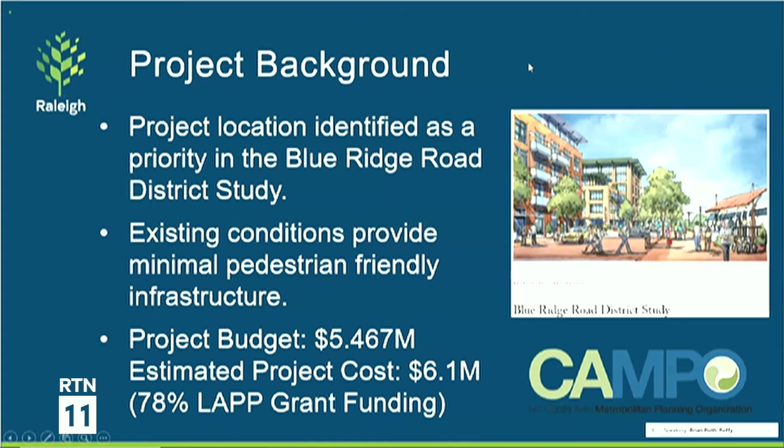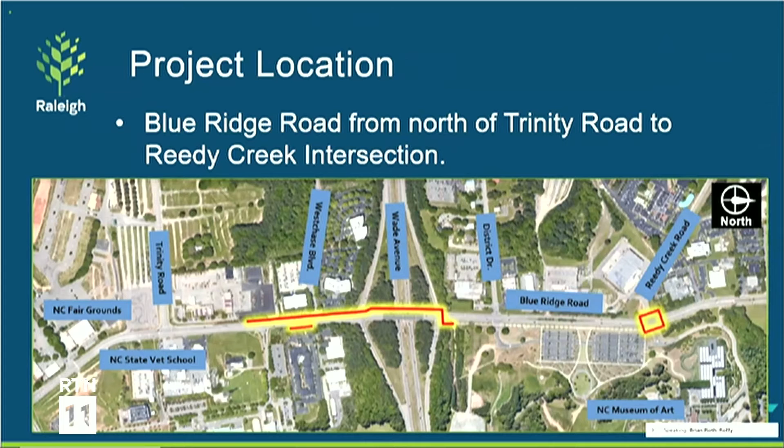So just a quick location. Obviously, Blue Ridge Road is very long, but really the intent of the project was to provide connectivity between two existing sets of infrastructure. To the south, we have a lot of things going on, the NC Fairgrounds, as well as the NC State Vet School. And then moving north, connect to the North Carolina Museum of Art, as well as the Reedy Creek Trail.

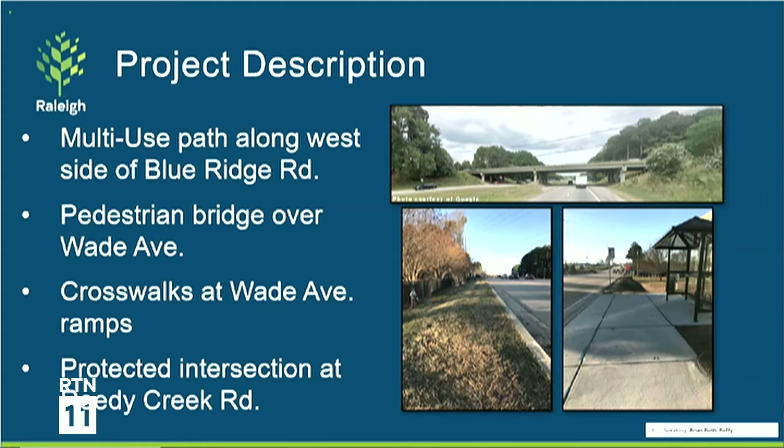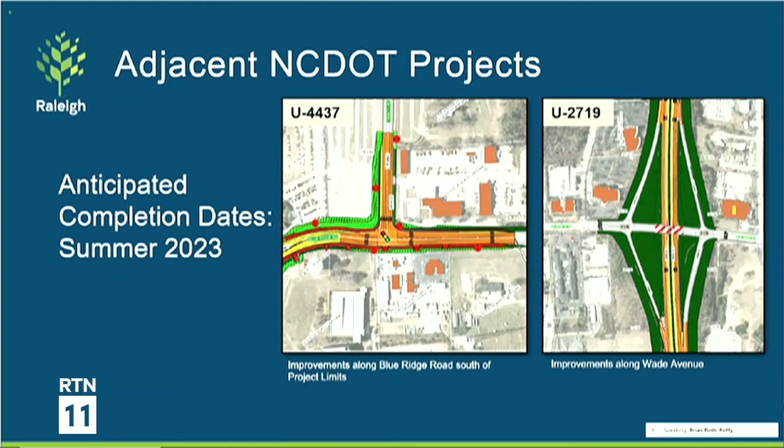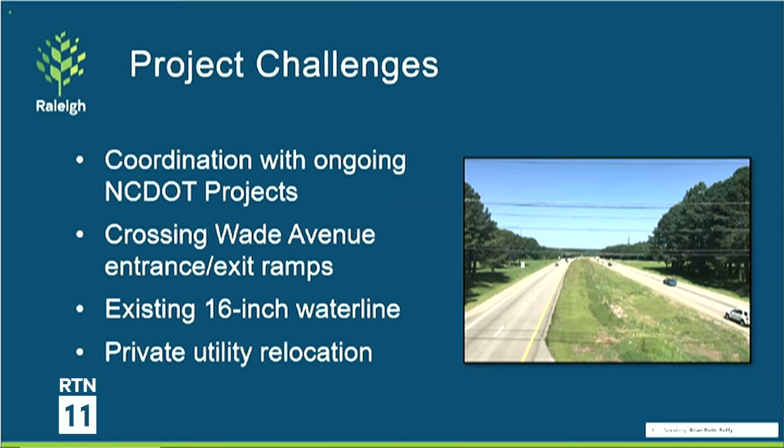So some of the project challenges we have, I just mentioned the NCDOT projects. There's a lot of coordination with them and trying to get all that project work completed in a similar time frame. Some other project challenges we have are crossing the Wade Avenue entrance and exit ramps, as well as relocating an existing 16-inch water line that goes all the way under Wade Avenue, as well as Duke power lines and telecommunication lines that go over Wade Avenue, where we will be installing our new multi-use path bridge.

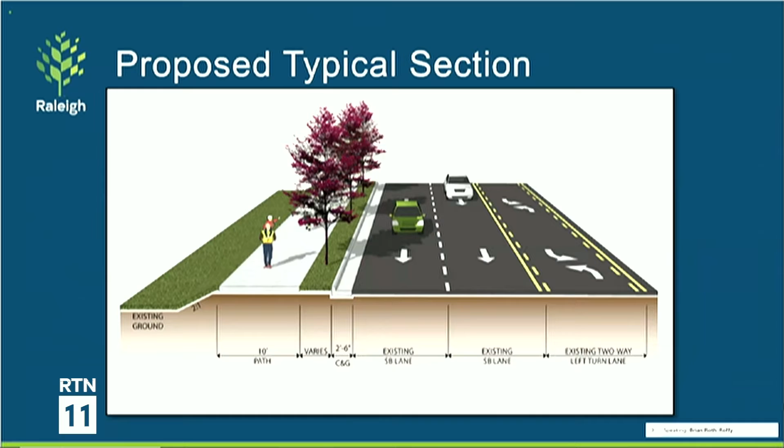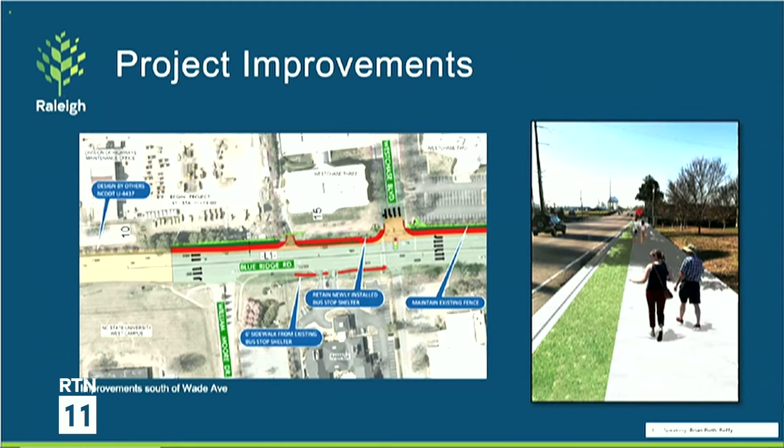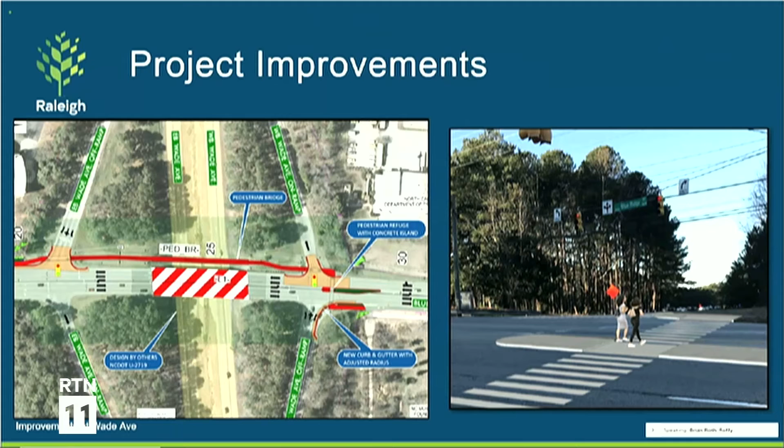The next slide shows a rendering of the proposed bridge. It's 10 feet wide, and it will have lights and fencing. This was discussed with a lot of the community, as well as PNC, and North Carolina State University, and other participants in the design phase.

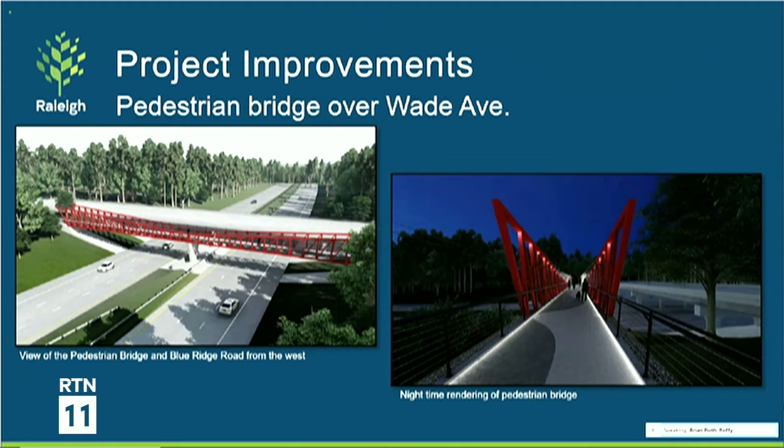On the north side of the project is the Reedy Creek protected intersection. This is actually the very first intersection of this kind that we have designed in the state of North Carolina. One of the main improvements of a protected intersection is that it allows for both individualized pedestrian and cyclist crosswalks, so they are not combined in the same location—each has its own designated path, so there's no intermingling of the two.

This also has new raised medians to protect those spots where we cross. Eric, if you can go to the next slide.

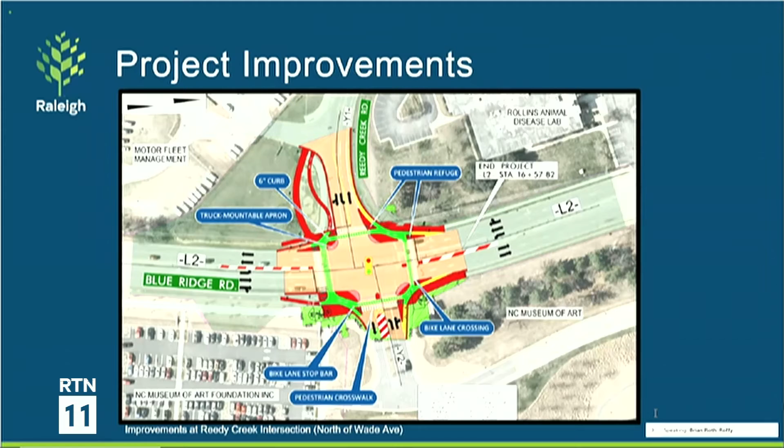So the conventional intersection on the left, when vehicles are trying to turn right, it's kind of hard to see the cyclist or the pedestrian. With the protected intersection, you can see in light blue basically a new island. This helps the geometry so vehicles slow down as they make that right turn, and also gives them better visibility of anyone crossing the road.

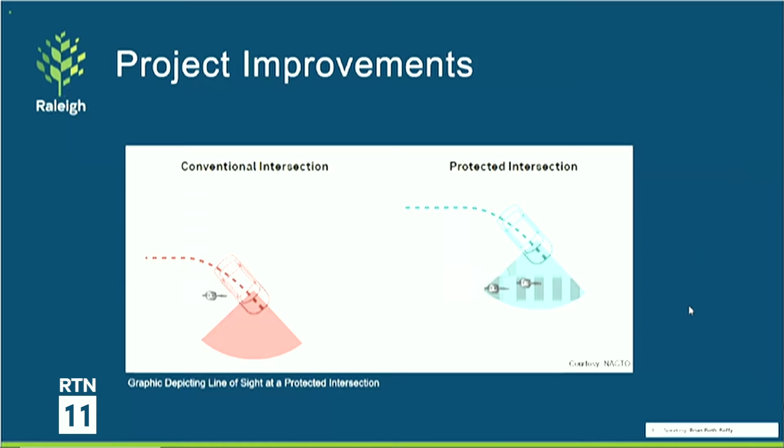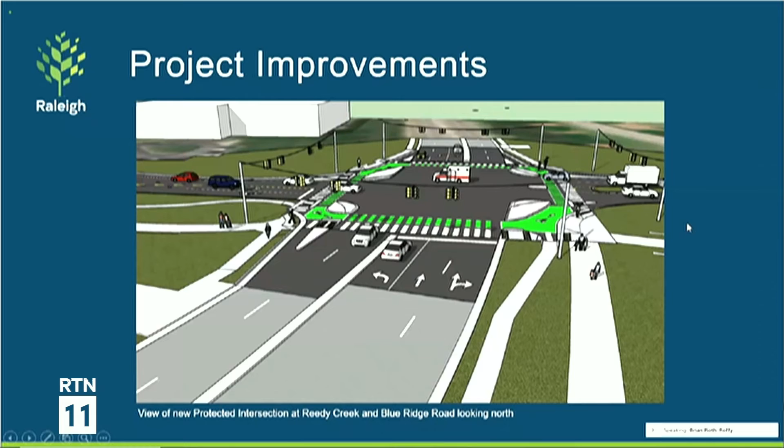The next slide is just another rendering of the image. You can see at the corners there's a protected area where cyclists and pedestrians can wait to cross, the green showing the bike path and the white showing the pedestrian path. This operates in a counterclockwise movement, and this will all connect near the Reedy Creek Trail.

For the public meetings, our first public meeting was held back in February of 2020. Our second meeting, due to COVID, became completely virtual—I believe it started in May, and the comment period ended in June. We also just presented to the city council meeting a couple Tuesdays ago on November 4th.

Throughout the design process and public feedback, our two largest comments were safety concerns crossing Wade Avenue and Blue Ridge Road at the westbound Wade ramp intersection. To make this safest for all users, we tightened the corner radius for vehicles to reduce their turning speeds, and added new signal enhancements at both Wade Avenue intersections, including leading pedestrian interval timings and new advanced warning signs that alert drivers at these crosswalks.

The other main comment we received was about bus stop connectivity that I briefly mentioned earlier. It wasn't initially part of the scope, but we're adding a 6-foot sidewalk that will connect on the east side near the Ramada Inn driveway, leading to a crosswalk to reach the new Blue Ridge Road multi-use path.

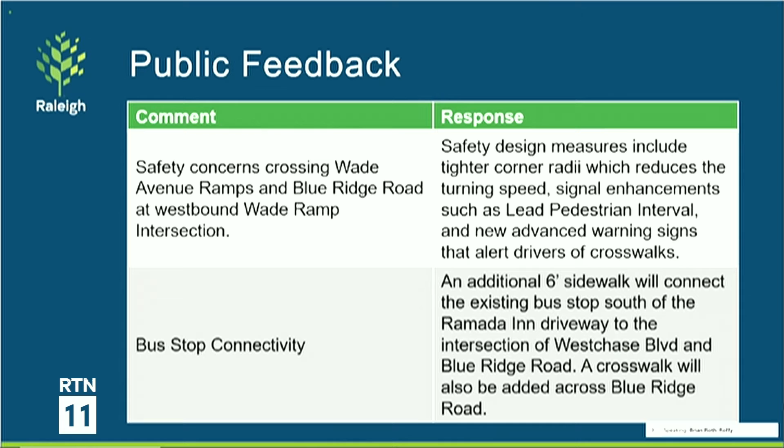For our current schedule, we've had our design plan public meetings and we're currently about 95% finished with the design. We just presented to the city council. We're expecting to start right-of-way easement and acquisitions this winter, and hoping to advertise and start construction in the spring and summer of next year. The anticipated completion is about 12 to 15 months—we're looking at a fall '22 completion to connect from Trinity Road in the south to Reedy Creek in the north.

That's where we currently are right now, and that is what I had to present. I apologize for the stuttering, but please feel free to ask any questions.

Thank you for your presentation. I didn't notice any stuttering. Yeah, I don't have any questions—I think this is great.

Yeah, Terry? I will say, since there don't appear to be any questions, I see some of our comments from a couple of years ago in the previous plan reflected in the adjustments you've made, and I really want to say thank you for that. It looks great. I think this is a tough section, and I think this is going to be a really good facility.

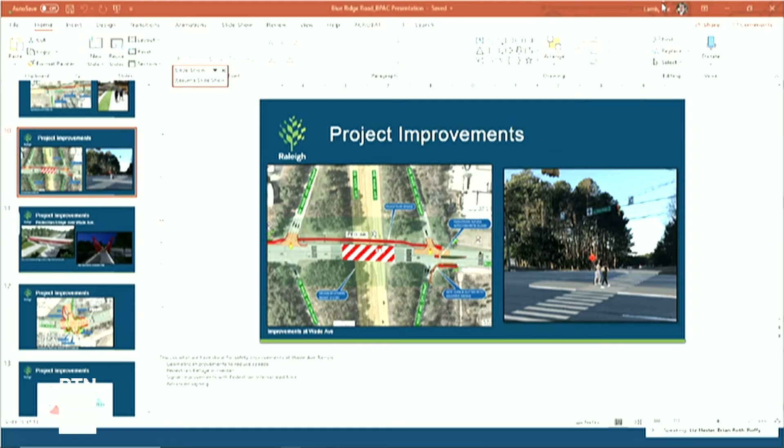Okay, cool, that was really where I was going with that. Thanks. Also, since I ride on this road quite a bit, thanks, this is going to be great. I'm very excited to see it.

Just want to make sure, there might be a crossing where you're having to stop, that there's some way to stop the traffic. One of the things we're anticipating is that there's going to be some fairly wide-scale redevelopment along the west side of the street. As that takes place, we're talking about partnering with the state of North Carolina, having conversations about what that would look like. Our goal is to reciprocate what we have on the east side of the street with the Art Museum in some form or fashion on the west side.

As you think about going up through that section, like the turn on that stretch of Reedy Creek before it connects to the Greenway, that's another thing to flag if people are going to develop that corridor—it'd be nice to have some sort of path along that road. There's a decent median and shoulder now, and it does pick up the Reedy Creek Greenway that goes into Umstead after you cross Edwards Mill. So, anyway, this is exciting. Thanks.

I'll second what Liz said. It is a little awkward—you come off the Greenway at the museum, this beautiful Greenway, and then all of a sudden you're riding on a road. Then right at Edwards Mill there's a nice little bike path again until you get into Umstead to pick it up there. So anything you guys can do to think about that as development occurs would be awesome. Technically along Reedy Creek there is a Greenway all the way down.

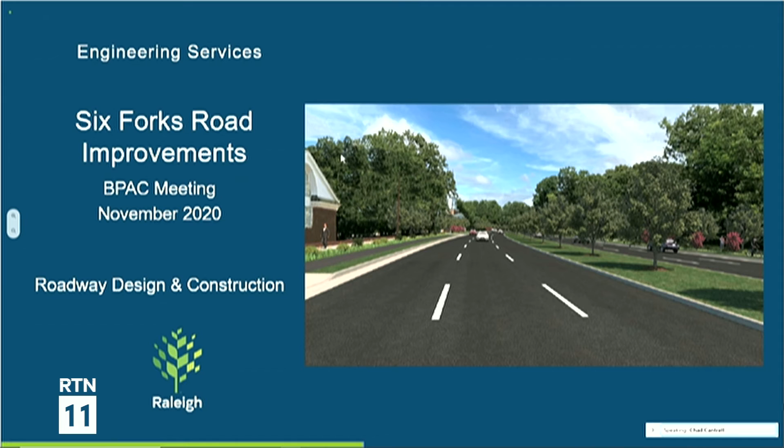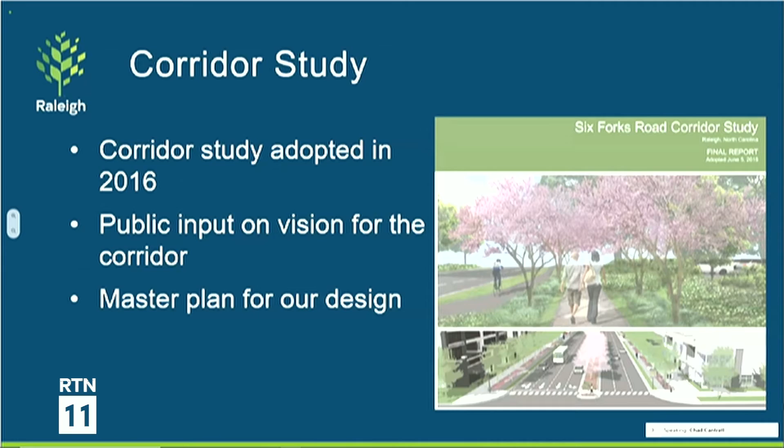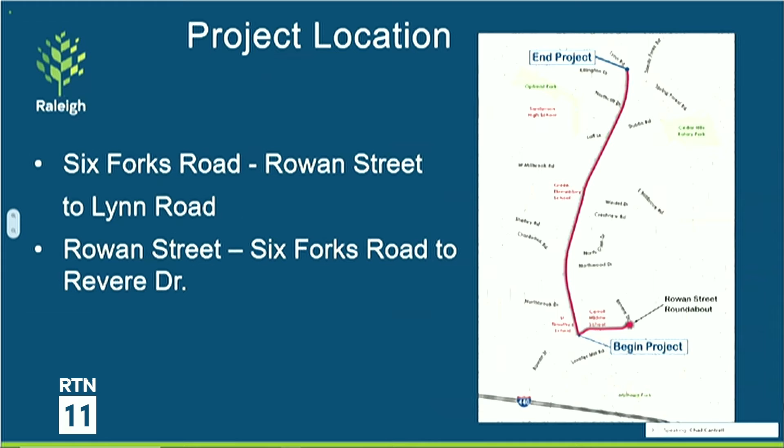On this project, our consultant K&K is putting the plans together for us. If you are aware of the project, you may know there was a corridor study prepared early on, and I'm going to steal a quote from that: the goal of the design study was to determine the needs of the users and provide a framework to improve multimodal transportation that challenges the ideas about the appropriate balance between automobile travel and other forms of travel. That corridor study will be the basis of the master plan for our project. The study looked at everything north of 440 up to Lynn Road, but our project in this phase is Rowan Street to Lynn Road, with the alternative to review some improvements on Rowan Street itself.

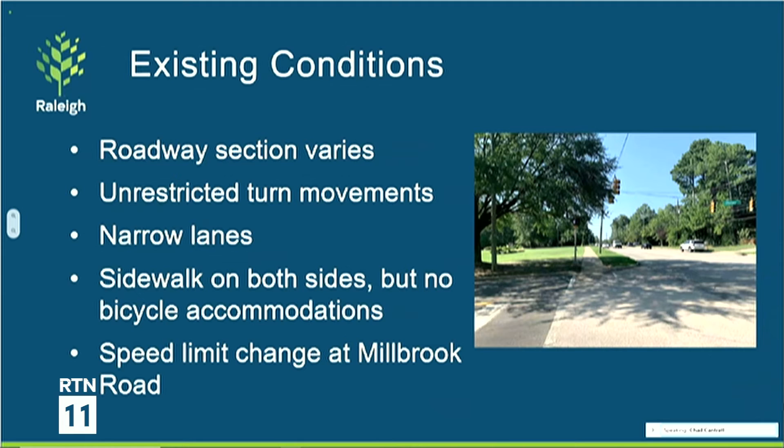If you've driven on Six Forks, you know the roadway section is quite varied. We've got through lanes that turn into turn lanes, very inconsistent. The turn movements are unrestricted now, people can make left turns out of properties. We're dealing with narrow lanes. We do have sidewalks on both sides, but currently no bicycle accommodations. And there is a speed limit change at Millbrook Road, with everything south being 35 miles per hour and everything north being 45 miles an hour.

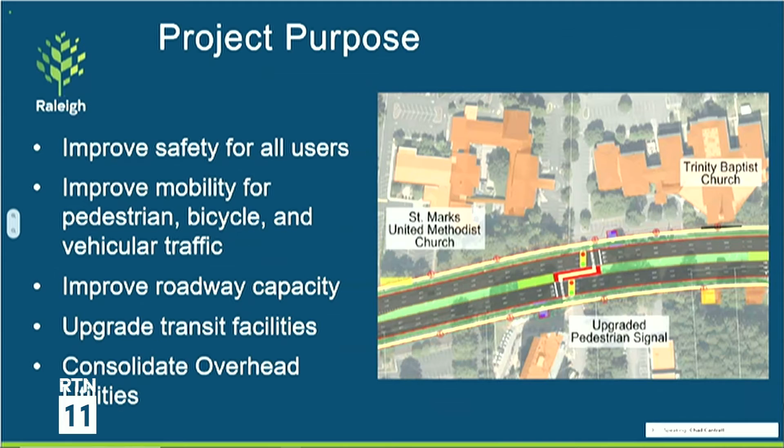The project purpose, again for all of our projects, is to improve safety for all users, but also looking at improving mobility for pedestrians, cyclists, and vehicular traffic. As part of this project, we will be providing a consistent 3 lanes north of Rowan Street in each direction of travel to improve roadway capacity, as well as upgrading our transit facilities and consolidating them. One of the other goals would be to try to consolidate a lot of the overhead utilities onto one side where possible. So this is a cross-section here.

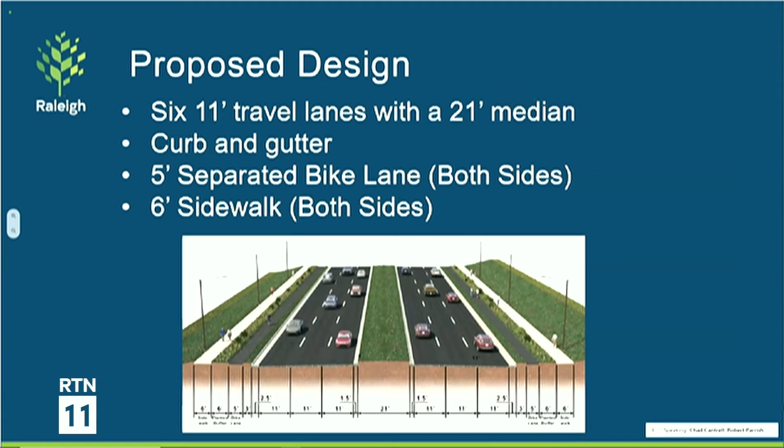This is a cross-section of our proposed project, where we have 6 travel lanes, 11 foot in width, so 3 each direction, with a 21-foot median. Something a little different on this project: instead of the 10-foot multi-use path we've been designing on a lot of previous city projects, we will be having separated bike and pedestrian facilities on both sides of the road. And the bike lanes would be one direction each.

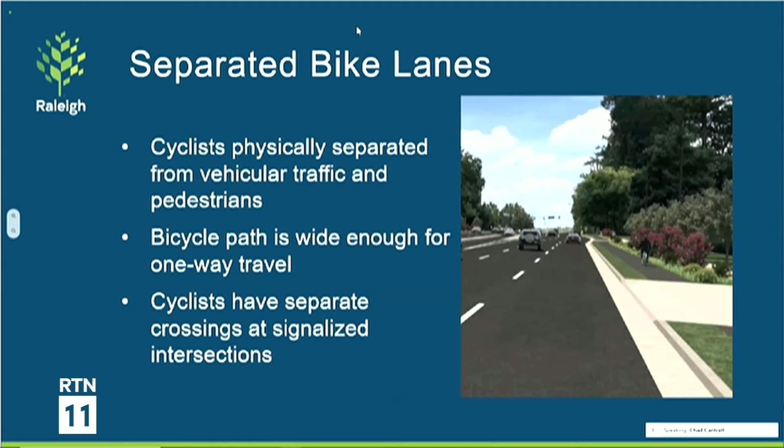Similar to what I just said, the facilities for both bike and pedestrian will be behind the curb. Bicycle lanes will be separated by about a 3-foot vegetative buffer. As you can see here, the picture is very dark, but there is a cyclist in there.

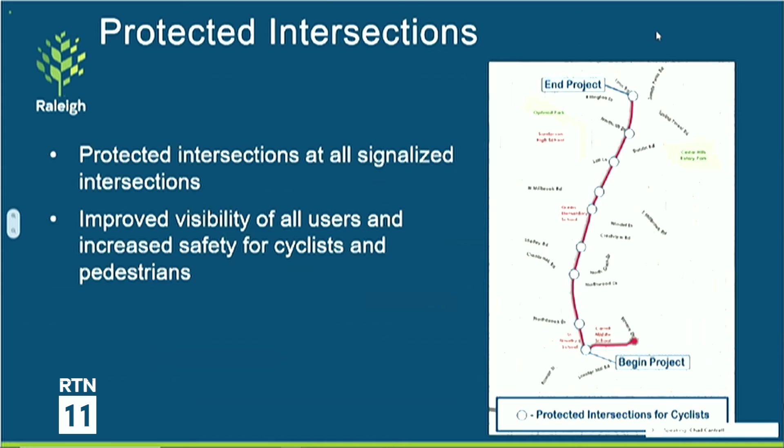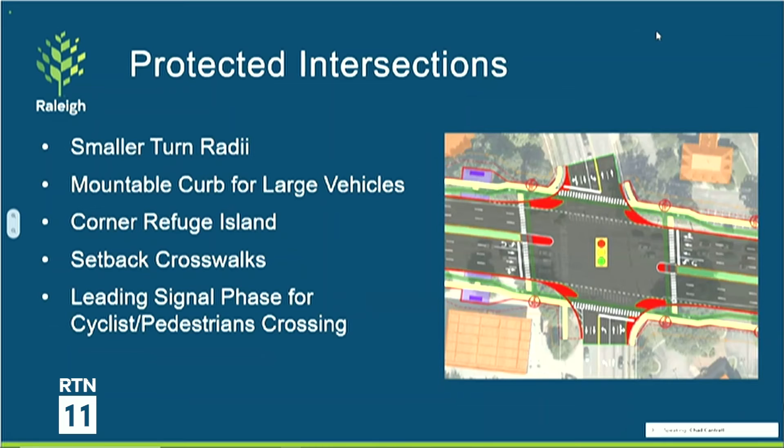The width of the cycle lanes is such to provide one way of travel. As Eric mentioned before, each of our 9 signalized intersections will be protected intersections, and Brian expanded on a lot of the benefits of those. Similar to his presentation, the intent is to have smaller turn radiuses for passenger vehicles to get them more perpendicular to the crossing. We'll also have a mountable curb for larger vehicles, and all facilities will be set back further from the travel lanes to improve visibility, with storage queues for cyclists waiting to make turns.

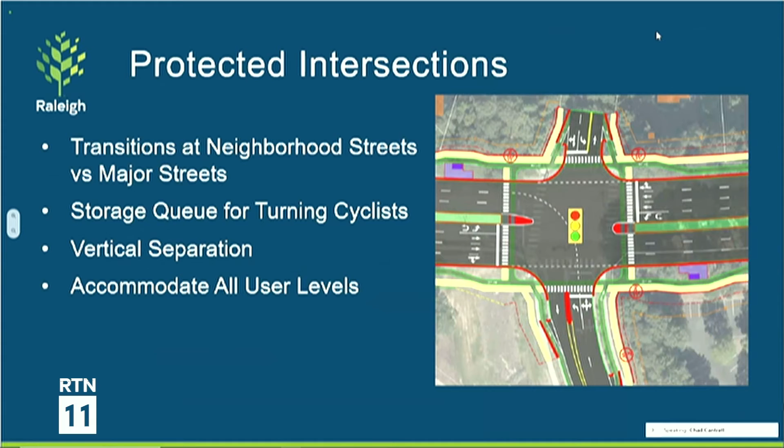One piece of feedback we got from our last meeting with transportation folks was to make sure we accommodate all users, including the mom with the pull-behind carriage.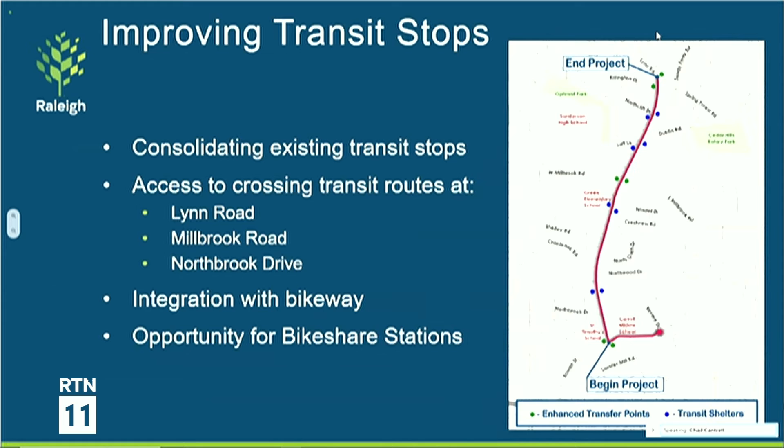Also part of this project, we will be consolidating existing transit stops, highlighted here in blue on the map, and improving access to crossing transit routes and integration with bikeways. One other item would be improving or providing locations for our bike share project as well.

This is Robert Parrish. I trust that there are going to be audible signals. Yes, I think that's standard — I'd have to check with Eric on some of that too. I know we've been talking about leading pedestrian intervals, LPI, but audible signals I imagine are pretty standard nowadays.

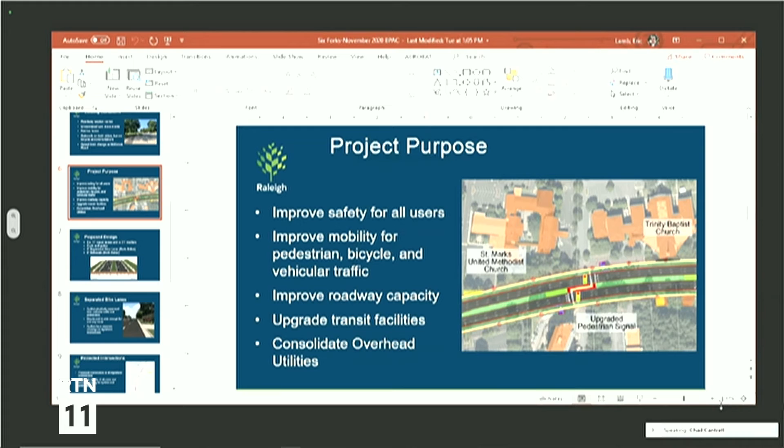It's just basically to handle the change or the different locations on each side. So, how wide will that path be across the middle? I'd have to double check. I know our sidewalk is 6 foot wide, so I would imagine we want to increase the width through there for any queuing of people in the median.

And will that be one phase, or will you navigate to the median and call for the next phase? That one I'd have to check in on. I would imagine with that zigzag, there may not be sufficient time to make it across in a single phase, but I will check on that one. It should be a 2-phase crossing.

Okay. All right. Well, I would like to say that I see that as a degradation in the service of that crossing from a pedestrian standpoint. So I understand the safety aspect of it, but having to wait 2 cycles to get through one crossing is rather inconvenient. It will be a little less convenient from that standpoint.

It is a huge improvement in safety, and also in terms of, as you have these types of staggered crossings, one of the advantages is it turns pedestrians to face towards traffic. This is similar to one of the crossings we have in place now up at Strickland Road in front of the middle school that's up there, and that's a 2-stage crossing as well.

I understand your point, though, that we're limiting the ability of people to cross the street all at one time. We are at 6 lanes, so having that ability to have a staggered crossing is seen as an advantage from a safety standpoint.

Also, if we're ripping up all the curbs and everything when the transit stops get moved, it couldn't be a huge difference anyway if we're doing all that curb work. I was just saying, if we're going to be modifying so much beyond the curb, I'm just curious if the transit stops might be able to be moved to reconcile some of those concerns.

Okay. We can take a look. One of the goals is also to consolidate some of these transit stops.

Ms. Hester: And for those, just a question about the Z crossing as well. Would bikes be expected to cross there using that? I don't think so. We've got the next crossing up or down. Okay, cool.

It gets used a lot by bicyclists right now, and there's a school that it feeds from. Carroll Middle School's right there.